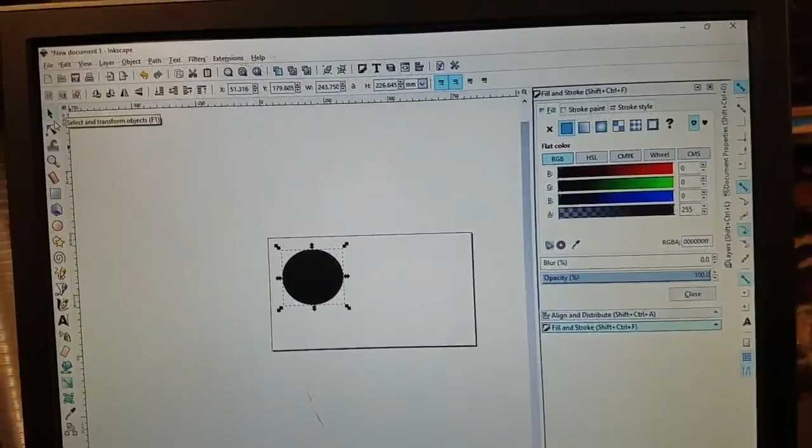This is what I refer to as the select tool. We've selected our object, and if we look up here at the width and the height, we see that it's actually not quite perfectly circular. I'm going to change it to inches, just so it looks a little more familiar to me. And we see that we're at 9.5 plus inches by almost 9 inches.

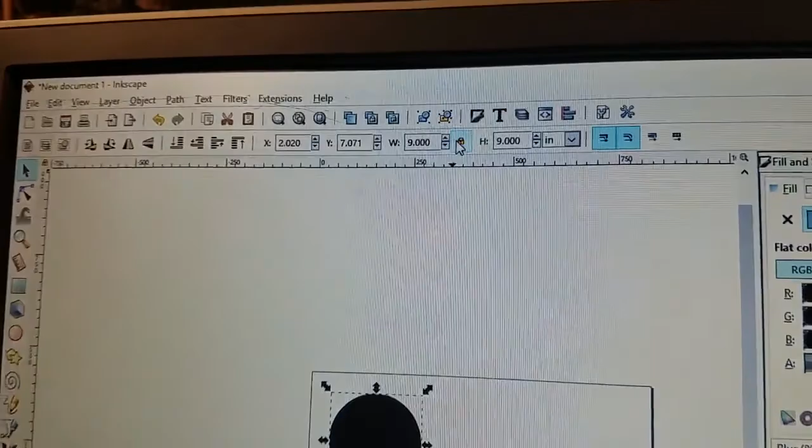I can change my width and height both to 9, and now it is perfectly proportional. If I want to keep that proportion, I can use this little lock tool, and if I change this to 5, the height follows.

Now that we've got this circle, we need to start getting it ready for the laser system to interpret it. In doing so, we're going to use the fill and the stroke and assign colors and conditions to the fill and the stroke that we apply.

The reason we're going to do that is the colors can be mapped to behaviors on the laser, either an etching behavior, which we will refer to as a raster, or a cutting behavior, which we'll refer to as a vector. Those colors need to work in absolute red, green, or blue values. We can also use the CMYK scale, but for now we'll stick with the red, green, and blue. RGB scales work in values of up to 255.

So if we want to make our circle filled red, we change that value to 255 red, make sure that green and blue are both at 0, and we have a red fill. We leave this bottom one at 255. That's our opacity scale. Obviously, if it is less than opaque, it could cause problems later on with the laser.

The next piece we want to work with is the stroke. This will be the outside line around the circle. So I'm going to click on the Stroke Paint tab. I'm going to apply a flat color. And in this case, I'm going to make that outside stroke green.

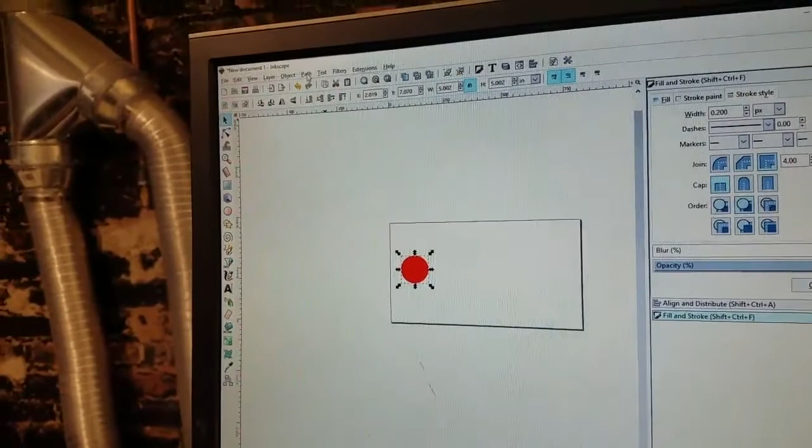Now that we have our shape with the red fill and the green stroke around the outside, there's one last step we need to take to get this part of our file ready for the laser. We need to take this object, which is currently a circle, and change it to a path. It's a very simple step. We just go to Path, Object to Path, and we're done.

Doesn't look like a big difference to us, but the computer will be able to translate it now on the laser. If we don't take that step any time we've used one of the tools on the left-hand side of the navigation pane - the circle, the square, the text file - the laser will just ignore it when we get there. It will look like it's going to go, it will beep at you once, and then move on.

So our next step will just be a very simple text. We're going to add NHV for our beloved MakeHaven. I'm going to take this up to 2.5 inches.

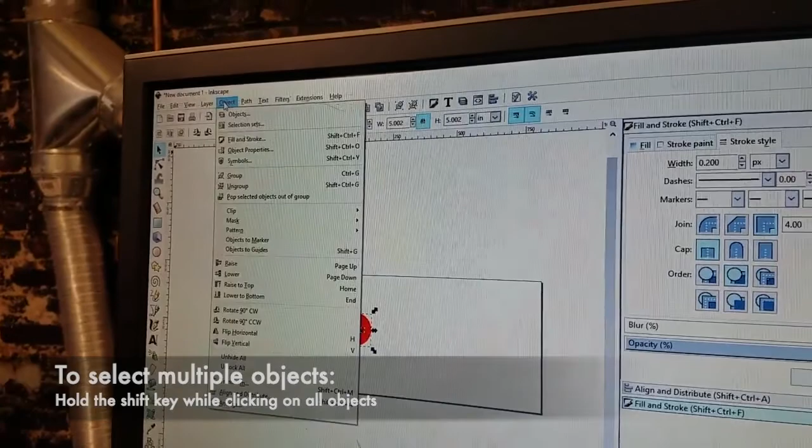We can place it on our circle. If we want to make sure that's perfectly aligned, I can go to Object, Align and Distribute. I'm going to work relative to the biggest object, or I could also go relative to last selected, etc. I'm going to center it horizontally and vertically, and now our text is in the middle of our circle.

I'm going to select the text again. I'm going to, as I did with the circle, go from Object to Path. So now we no longer have editable text, we have editable shapes that look like text. I can tell these have become editable shapes because when I mouse over them, it's showing me the nodes. The nodes are those points in the workspace that I mentioned earlier.

I've selected them all just by holding the Shift key and clicking along. You can also do a click and a drag. I'm going to take a look at my fill and my stroke. Right now, it says that paint is undefined. That's going to confuse the laser a little bit, so we definitely need to give it some definition.

We'll go with a flat color. In this case, we can leave it at black, which is 0 red, 0 green, and 0 blue. We're going to go ahead and add a black stroke as well. And in this case, we'll just go ahead and set that stroke at 0.

Sometimes getting rid of the stroke can be a good alternative. You could just do that by selecting no paint, but every once in a while a stroke with no paint will also throw an error on the laser as well.

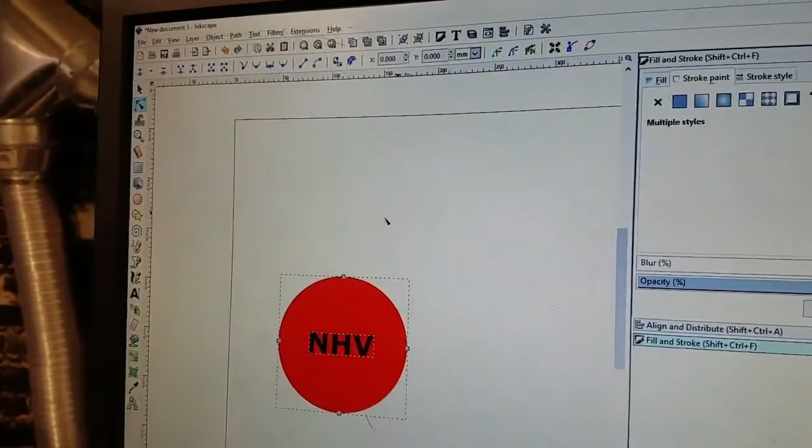Now that we have everything looking the way we want it to, I'm just going to hit Control-A to select all. I'm going to move this all up towards the top left corner of my workspace. And the reason we want this in the top left corner of the workspace will make a little more sense when we get to the laser, but in short, the laser is going to be starting its work from the top left corner of our file.

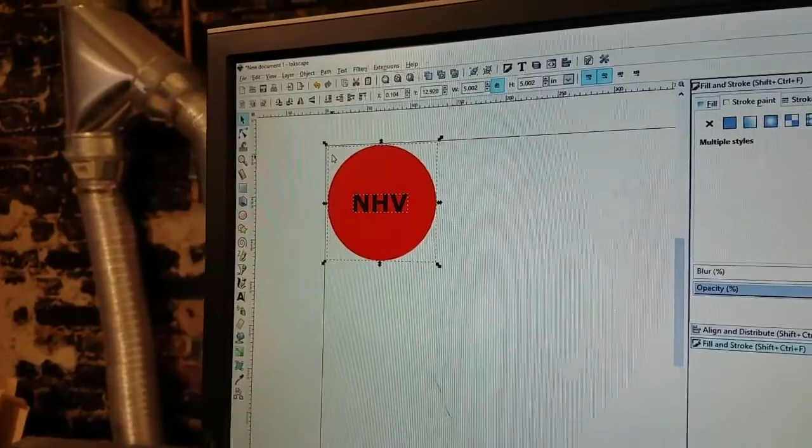And if we know where our object to be cut, etched, etc. is on the file, it's a lot easier to place that point of origin on our work material on the laser.

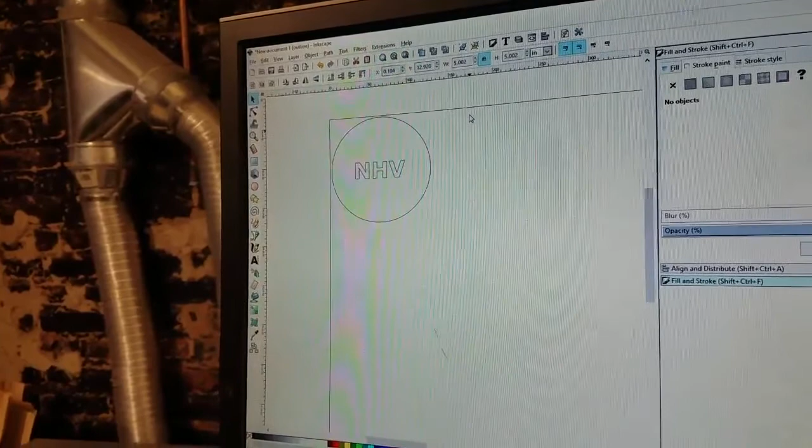The last thing I'm going to take a quick look at is the display mode. I'm going to go from View, Display Mode Normal, to Outline. And this just shows us our vectors. If anything appears on here that doesn't belong, maybe you put an accidental tiny stroke in there that's going to cut into your object later on and ruin the project.

Or if something does not appear when you look in your display mode, it could be stuck as a raster file. Maybe you didn't convert a PNG that you were trying to bring in. That'll become apparent at this point. Everything looks good to me here, so I'm going to go ahead and save as.

I'm going to save it as keychain NHV.

And now I can get it ready to go. This is one of our universal lasers. It is a 60 watt CO2 laser system. We have 2 of these in-house. They are basically the same machine, although slight differences in use cycles, age, etc. may give you a slightly different result from one machine to the next.

So always be sure to check out and test your file if you have been moving from one universal to another universal between cuttings. As a MakeHaven user, the number one thing you can do to help take care of the lasers is to just be gentle with it.

Always make sure that when you open the lid, you open it fully so it does not slam back down. Make sure that you close it gently. We take care here because the CO2 lasers are finicky and delicate, and if we smash this lid down or let it drop, it can jostle those laser tubes, which will over time lead to degradation of quality and ultimately necessitate a replacement. Using the MakeHaven universal lasers safely is an easy thing to do.

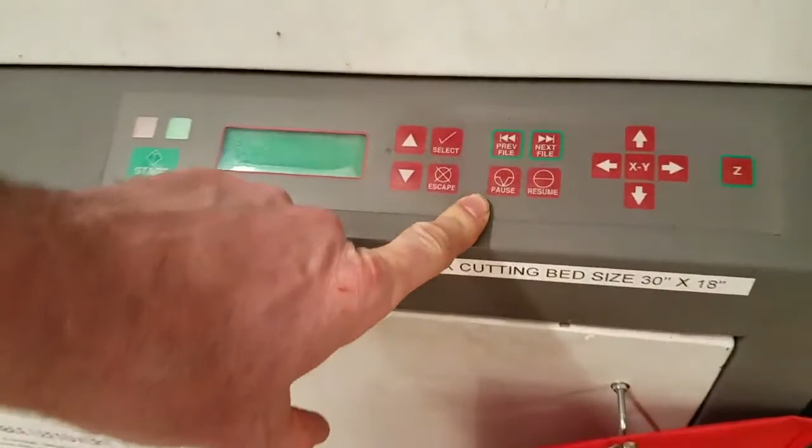It means that if you need to take a step away from the machine to use the restroom, take a phone call, etc., you can either ask another member to keep an eye on the job for you, or you can pause it for a moment using the pause button on the front of the laser. Wait for the job to stop, step away, do what you need to do, and then press resume when you return.

As we run a job, it's not uncommon to see flames. Very often that just means the laser is reigniting some of the vaporized material. But every so often, our laser moves to a different piece of the workspace and a flame stays put. That means our material is burning. That means we have a small fire that we need to deal with.

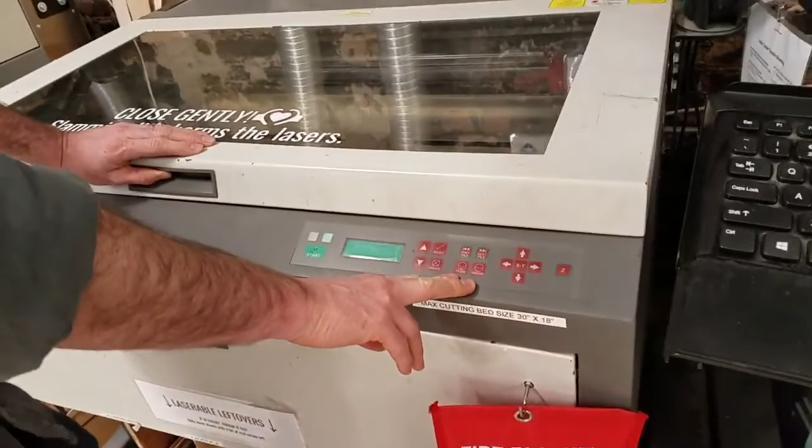There are several things we can do to take care of that. Again, we can pause it and try to salvage our job by putting the fire out afterwards. If your job is at this point irretrievably damaged, or it was a test cut, or if the fire is starting to spread through your material faster than you're comfortable with, the easiest way to stop it is to just lift the lid a little bit.

This will change our cutting laser to a spotting laser. Very often that can be enough to take away the heat source. The other thing that this will do is bring in a sudden gust of wind. And if it's a small flame, it's kind of like blowing out a birthday candle, because there's a blower pulling air from the back of the machine through the front, as well as another blower that's evacuating the vaporized material.

From the building. If we've opened the lid a little bit and the flame is still burning, again, this is all about comfort level. If you feel safe doing so, you can try to blow it out.

You can always use a fire blanket. They will be hanging on the front of the lasers. Rip it open, pull the blanket out, lay it over the burning material to smother the flame.

If the fire blanket is for some reason unavailable, or if the flame has spread to a point where you feel like it is out of control or not manageable with the fire blanket, you can take the CO2 fire extinguisher off of the front of the Epilogue laser in the back corner. It's labeled as carbon dioxide. It's also recognizable with this black cone.

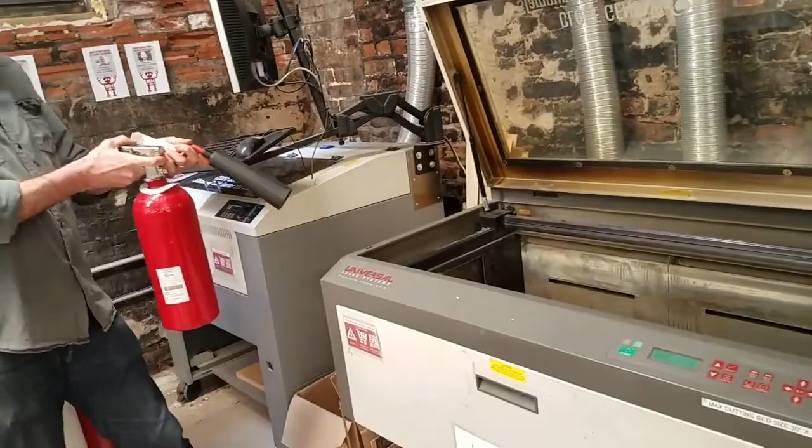Pull the pin, stand back several feet, point it at the base of the flame, squeeze the handle, put the fire out. We use the CO2 fire extinguisher in this case because it's going to cause the least additional damage to a laser in putting out the fire. And we can clean it up and get it back in service a little bit faster.

If for some reason the fire extinguisher is empty, exhausted, or otherwise unusable, there are additional fire extinguishers located throughout the space, including a chemical fire extinguisher outside of the wood shop and a water fire extinguisher in the kitchen. If you need to escalate to using one of those fire extinguishers in place, at that point it's probably a good idea to dial 911 and get assistance from the fire department and make sure that everybody in the space knows that we've got a problem.

Beyond fire safety, material safety is another concern we have when using the lasers. That means we need to be cutting materials that are both safe for the people around the laser as well as for the machine itself.

A general rule of thumb is that anything natural or organic is probably relatively safe. Some examples of safe organic materials to use would be paper, cardboard, wood, plywood. You can use the lasers to etch anodized aluminum, and you can use it to etch glass. There's more details about the etchable and cuttable materials on the website. When in doubt, if something's not covered by the website, please be sure to do your research before bringing it into the space, and when necessary, consult with JR.

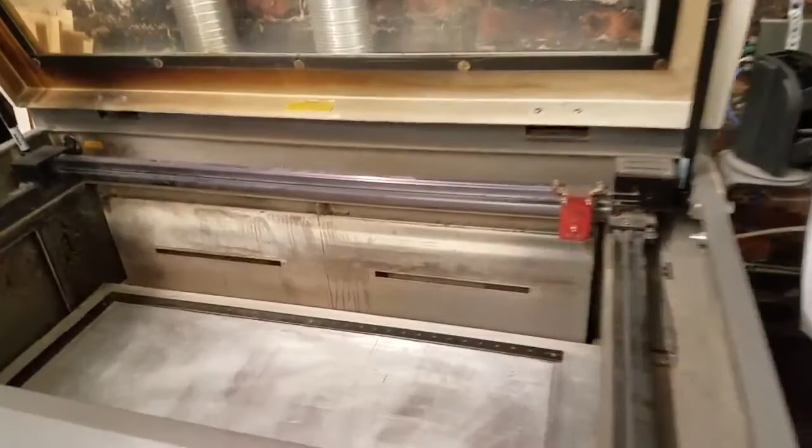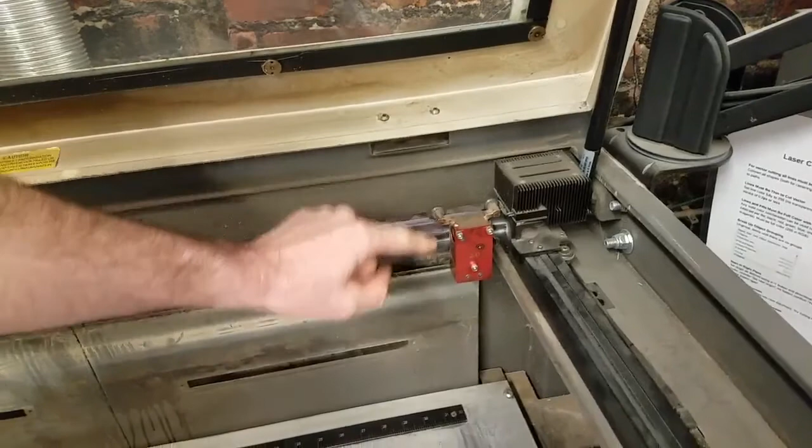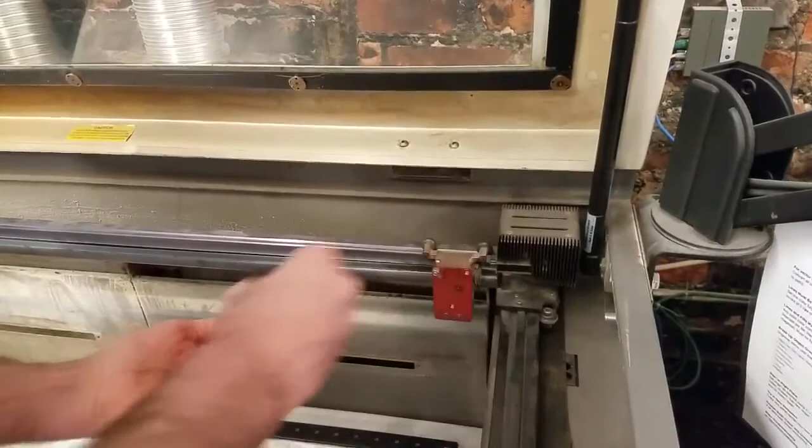Now that the machine is on, we're going to check out the optics and make sure that they're in okay condition to cut. If we take a look inside the Universal, we can see the port where the laser comes into the machine. It hits a mirror in this housing, another mirror in this housing, before hitting the lens down here. In order to make sure that the machine is ready, we can just remove the thumb screws from the front of the lens plate.

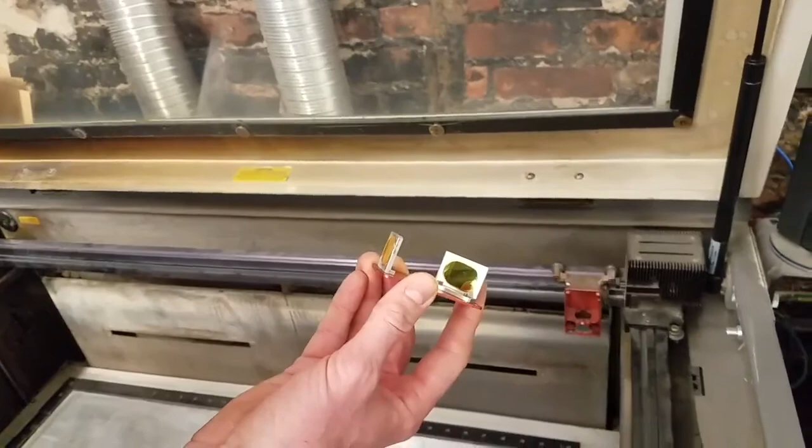Take a quick look to confirm that the lens and the mirror have no significant defects and aren't dirty. In this case, they're both in okay shape. We can replace the lens housing, making sure to put the screws in at least finger tight, and now that's ready to go.

If you need to clean the lens, supplies are located in the laser supply drawer. Using lens cleaning fluid and a microfiber cloth or lens tissue, just clean the lens very gently in a circular motion. Always apply the liquid to the tissue or the cloth, not directly to the lens. Clean sparingly, because we don't want to damage the lenses through over-cleaning.

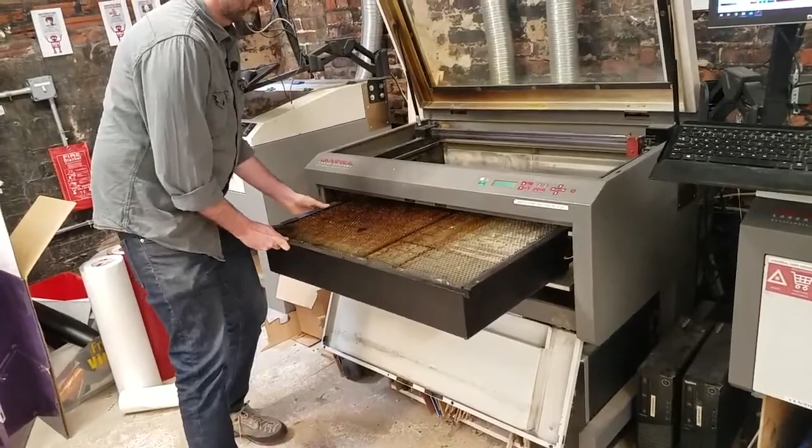Since we're going to be cutting through our material, we're going to use a table that will allow the smoke to vent from underneath the material. This is an example, a honeycomb table. After opening the front of the machine, slide it gently in, taking care to make sure that the table is low enough that anything will clear our lens housing. We want to make sure that nothing can interfere with the motion front, back, side to side. This is situated against the guides at the back of the machine.

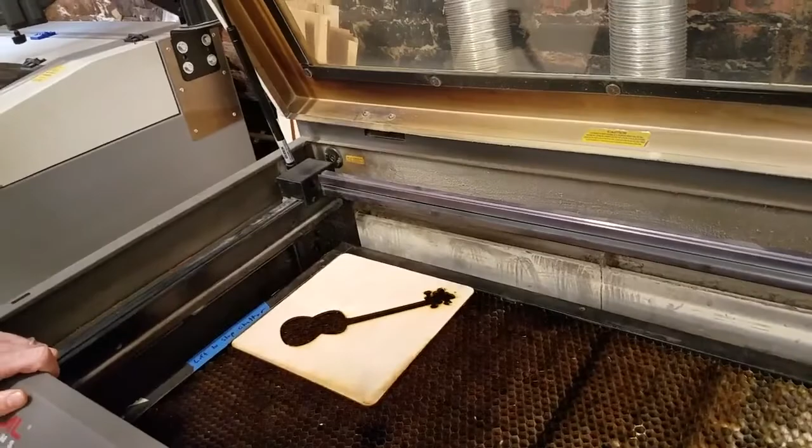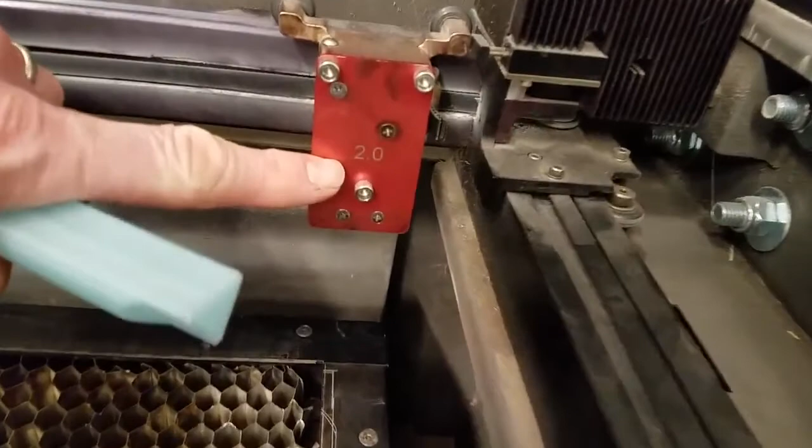I can close the front and place our material. In this case, I'm using a piece of scrap wood from the bin underneath the laser, and now that it is here, I'm going to focus the laser using this tool. This is a 3-sided focusing tool that can accommodate a 1.5 inch, a 2 inch, or a 4 inch focal length. You can identify the focal length by looking at the plate on the front of the laser. In this case, we are using the 2 inch.

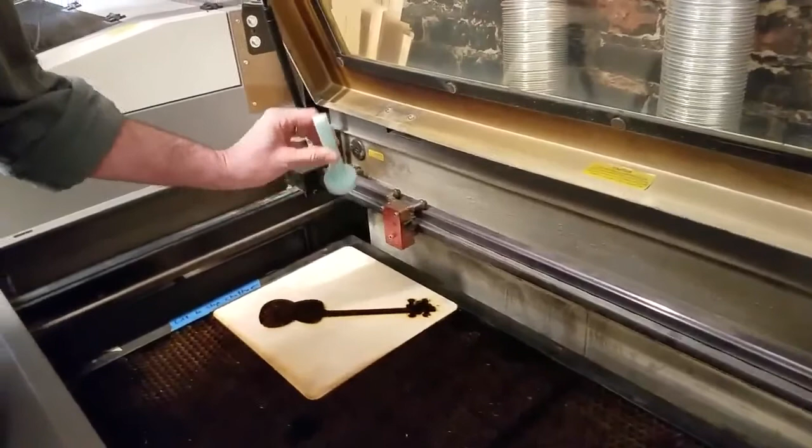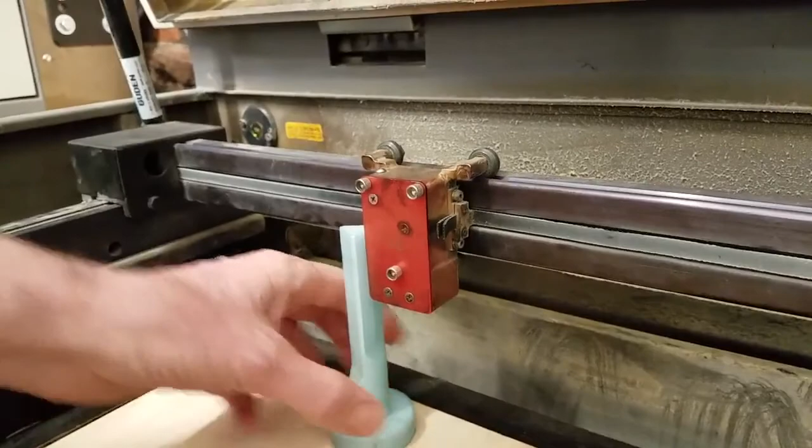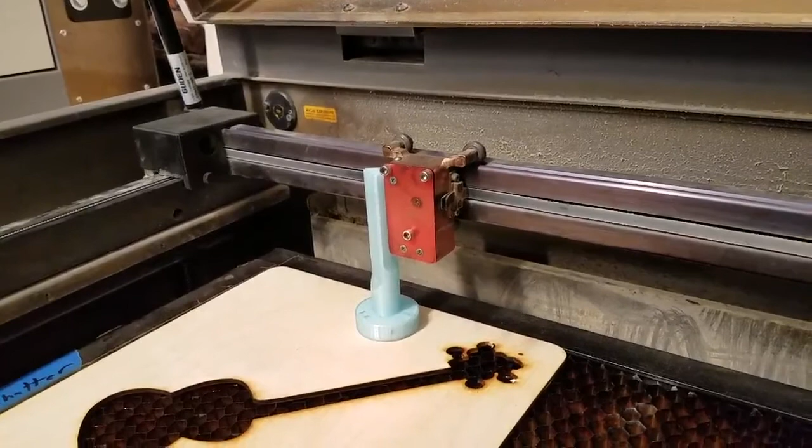In order to focus the laser, I'm going to hit the Z button. Using the arrow keys, I'm going to locate the lens housing over the material, making sure there's ample room for my focusing tool. I'm going to place the 2-inch side of the focusing tool along the left-hand side of the lens housing. And using the up and down arrow keys, I'm going to raise the cutting bed until I see the focusing tool shift out of the way. That's how we can tell it's focused.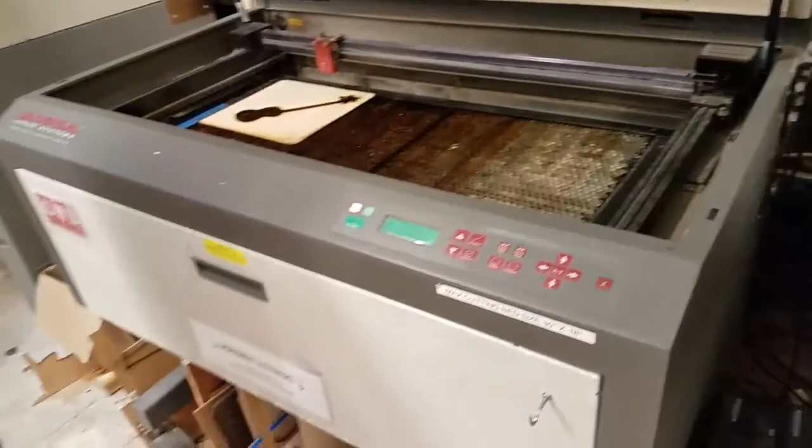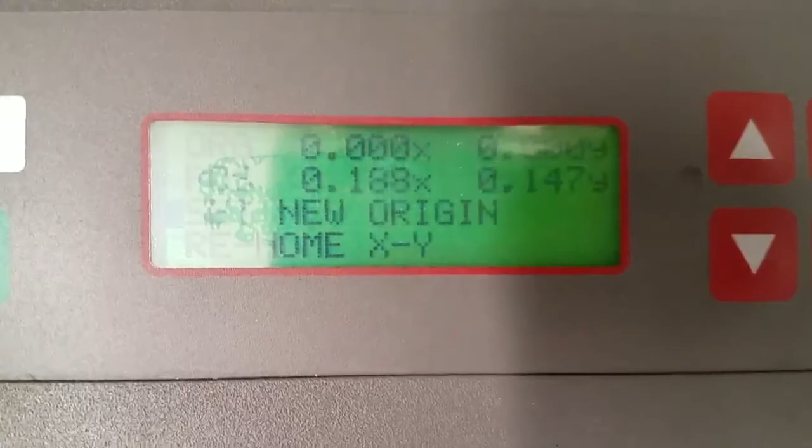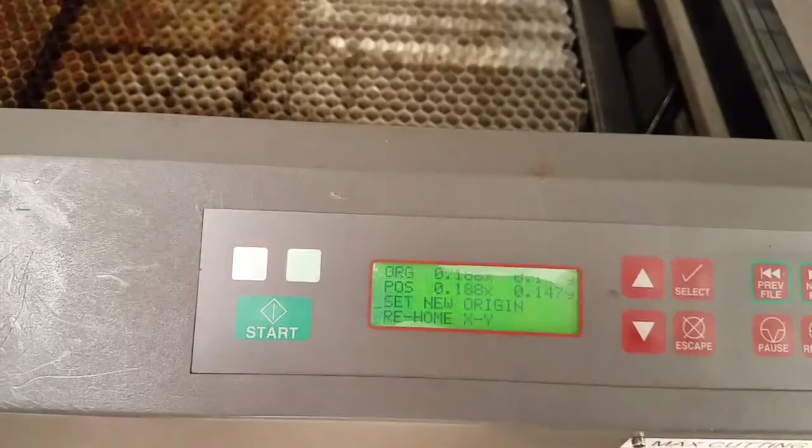Another adjustment we might want to make on the laser before running our job is setting the origin. We do that by hitting the XY button and using the directional arrows to place our starting point. In general, the machine will default to a starting point in the top left corner of the cutting area. On occasion, you may need to adjust this, or you may want to start somewhere else, for example, in the bottom right-hand corner of the material. In this case, I'm happy with where this is. I'm going to hit select to set new origin, and then confirm by selecting yes, set new origin. Now our origin and our position are the same. This laser dot is where that top left-hand corner of our file will begin.

Now that the laser is ready to go, it's just a question of sending our file.

We're going to do that by going to the extensions menu, selecting export and Win32 vector print.

This will bring up a dialog window in which we can map our colors to behaviors, powers, etc. We use the pen mode on this menu to tell the computer and the laser how to interpret each color in our file. In this case, we want to etch the black NHV letters, so I'm going to click on the box to cycle through to rast or raster.

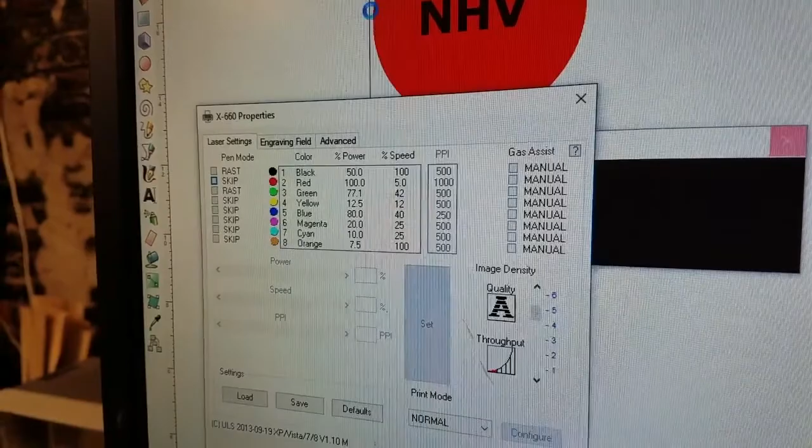We are going to skip the red in this circle. We're just using that for placement, so I will cycle through to skip. And then we're going to cut that fine green line around the outside, so I'm going to set that to vect.

The fourth option is rast/vect. In that option, the laser will etch the object and then trace around the outside. It's the same effect that you can get if we were to select raster for the black and then leave vector on the green. With rast/vect, you do sacrifice some control because you're allowing the computer to optimize the power for each operation.

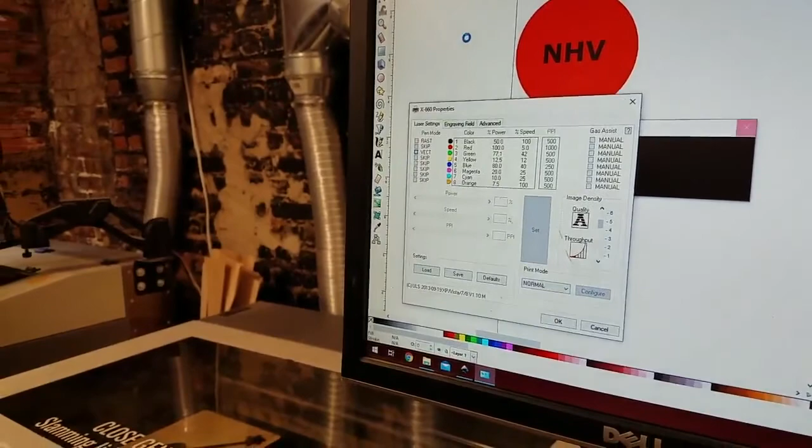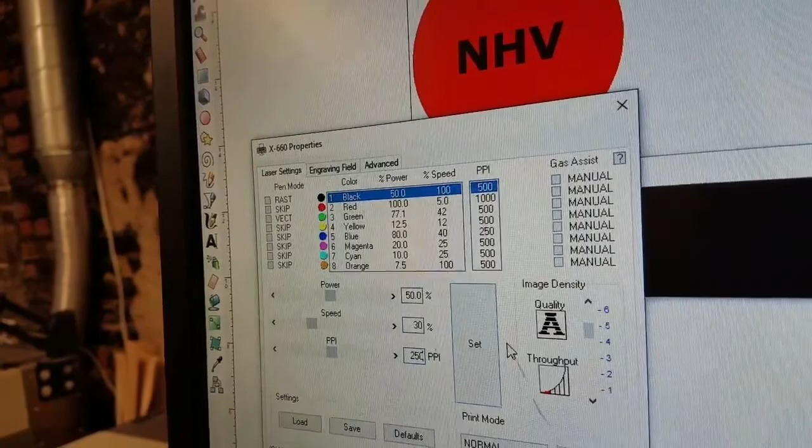Now that we have our pen modes set, we can set the power for each of our colors. For black, which we want to run a raster, I'm going to set the power to 50%, speed to 30%, and our PPI to 250, and hit the abnormally large set button.

For our vector, I'm going to use 75% power, 4.8% speed, and again, 250 PPI, and set.

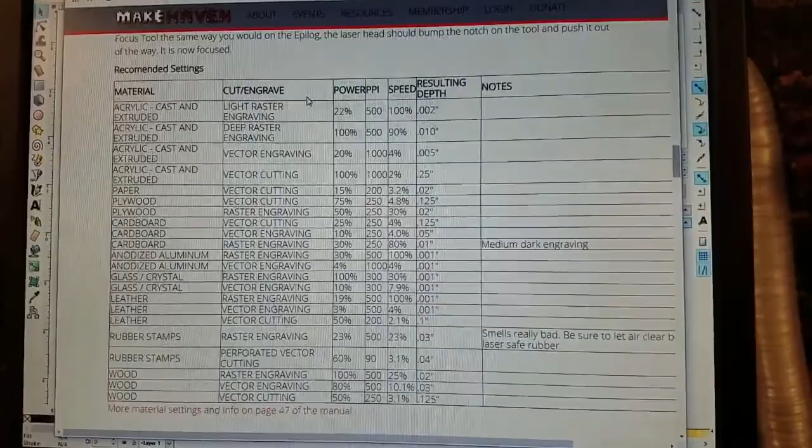These speeds, again, can be found on the MakeHaven Universal Laser Cutter webpage. We have a list of recommended settings for popular materials in the space. These are all considered starting points. You should certainly feel free to adjust them as necessary to get the desired effect.

Another thing to keep in mind is that power and speed are inversely related to one another. A slower speed is similar to turning up the power because the laser is staying over each piece of wood just that much longer as it slows down.

The PPI setting refers to the density with which the laser is firing at the material. A lower setting such as 250 is useful on a porous material like wood, cardboard, paper, etc., whereas a higher PPI such as 1000 really gets used on non-porous materials such as glass or acrylic.

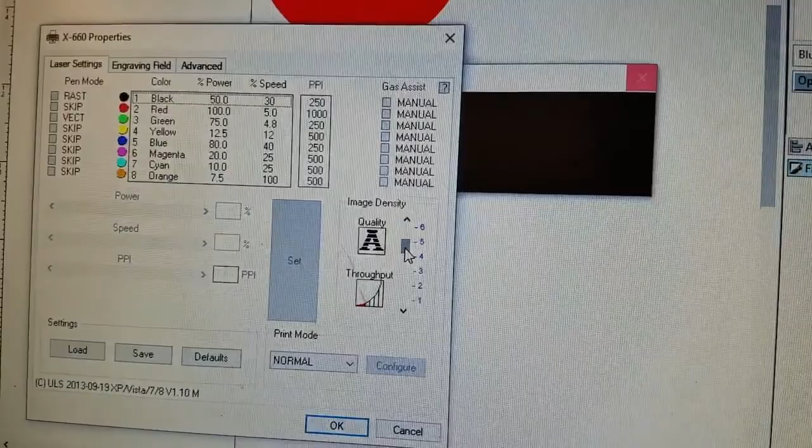Now that we have our power and our pen mode set, we can double check that the image density is set to 5. This should always be set at 5 when you open this dialog. If by some chance it's not, you want to set it back to 5. If this is higher or lower, it will result in stretching or compressing of your file, so it is something to keep an eye on.

The Advanced tab allows us a few etching options, optimizing a dark file for a dark surface, a lighter file, or in this case, keeping a black and white, sort of an on and off. This option allows you to control the print direction of your etching, either from the bottom up or the top down.

This can be useful in controlling the way in which smoke or soot collect on the job if you're having issues with that. Now that everything is ready to go, we've double checked our powers, our pen modes. I'm going to click on OK.

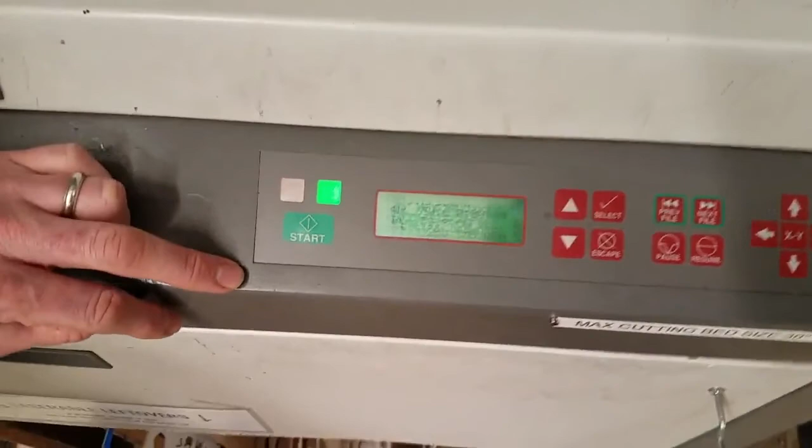The screen on the laser will display the settings for our first raster. It will always run the rasters before the vectors to make sure that the pieces don't drop out. Before hitting start on the laser, I'm going to make sure that the overhead ventilation is on by flipping the switch underneath the window. And now that that's running, I can hit the green start button.

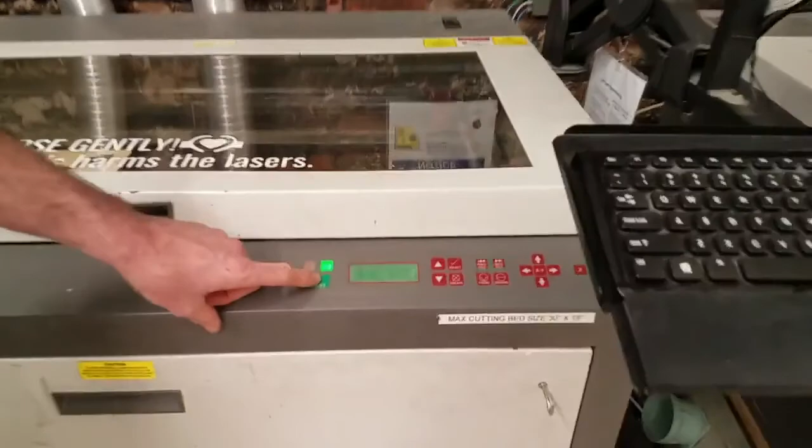Now that our job has run, I don't think the laser has made it all the way through this particular piece of wood, which is a little bit on the thick side for cutting. I do, however, think our etch looks good.

So in order to resend the job without re-etching, I'll switch black to skip and hit OK and send this to the laser again. As long as I have not touched the material or moved it in any way, the laser should be exactly on track with where it was on the prior job.

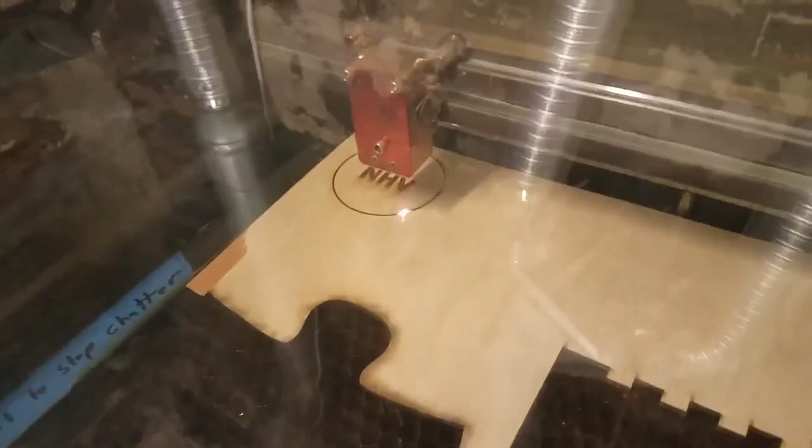Once the cut's complete, you can open the lid. Take pride in your work.

If you've been cutting something like acrylic that can have a strong smell after you've been cutting, you may want to just leave it in the machine with the lid closed for another 5 or 10 minutes to make sure that that smell is dissipated before you take it out.

Once you're finished, simply close the laser, turn off the machine, switch off the blower, close your files, and you're on your way.